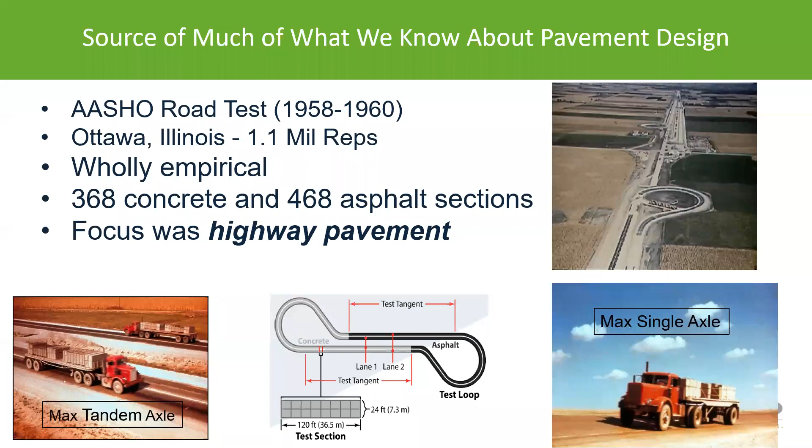And it says here that what they did there was look at what the pavement did based on the traffic that was driving on those 368 concrete pavement sections and 468 asphalt pavement sections. This was purely for highway pavement. Up with those test sections, well, they guessed asphalt and concrete.

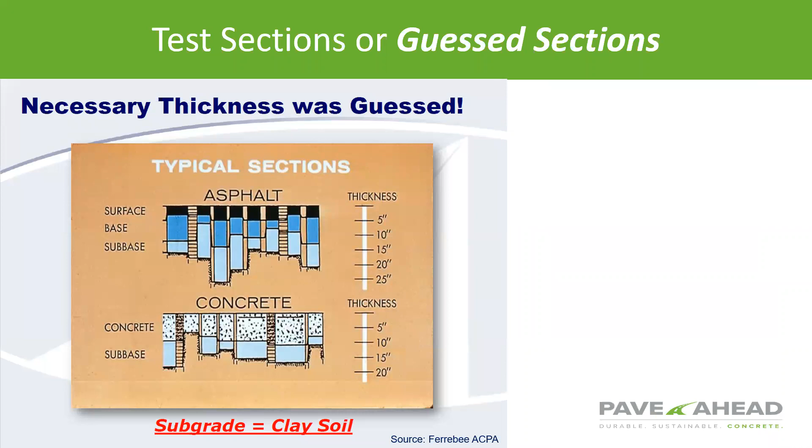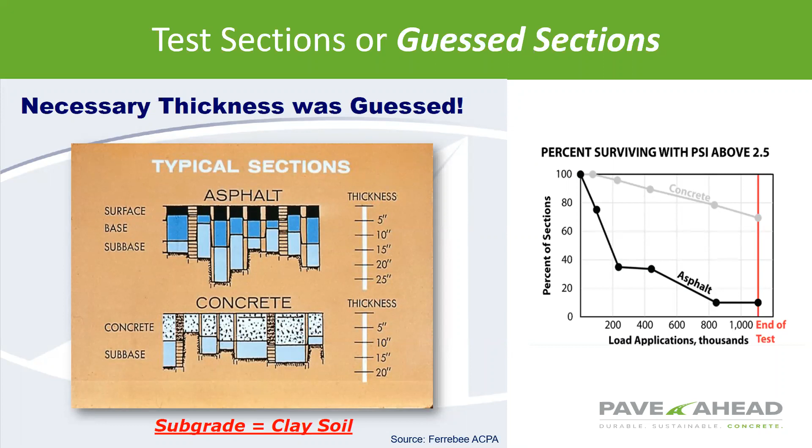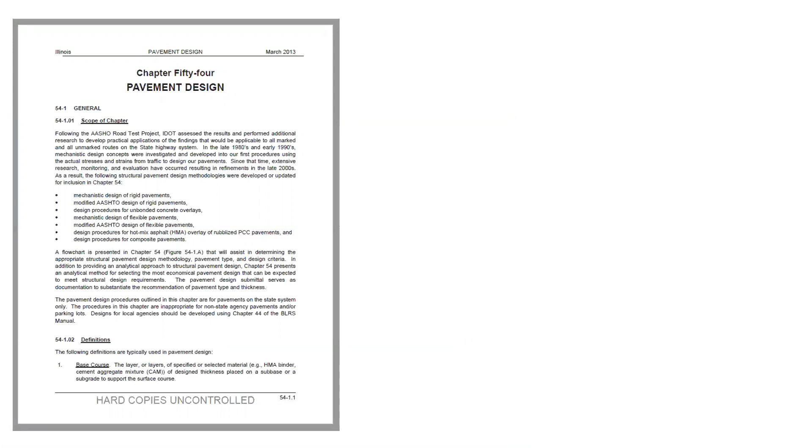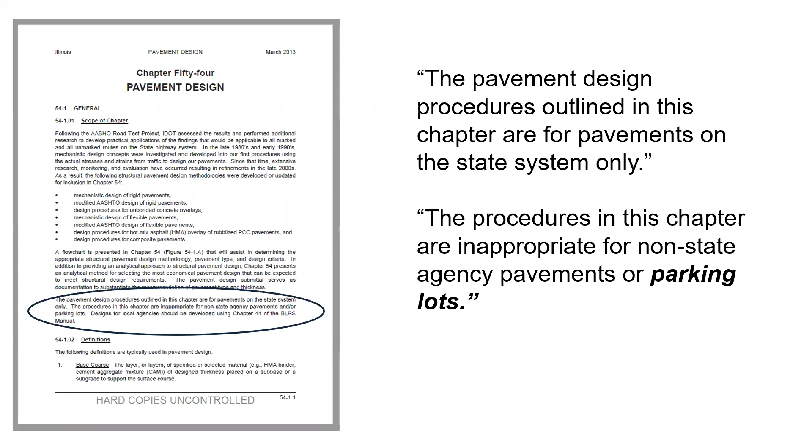The subgrade is clay soil. So really they're only based upon how this particular soil type performs, not around the country. This is the first pavement design manual that, about 2/3 of the way down the page, says the pavement design procedures are for pavements on the state system only and are inappropriate for non-state agency pavements or parking lots. So really what they're telling you is that applies to IDOT pavement design methodology and AASHTO methodologies as well.

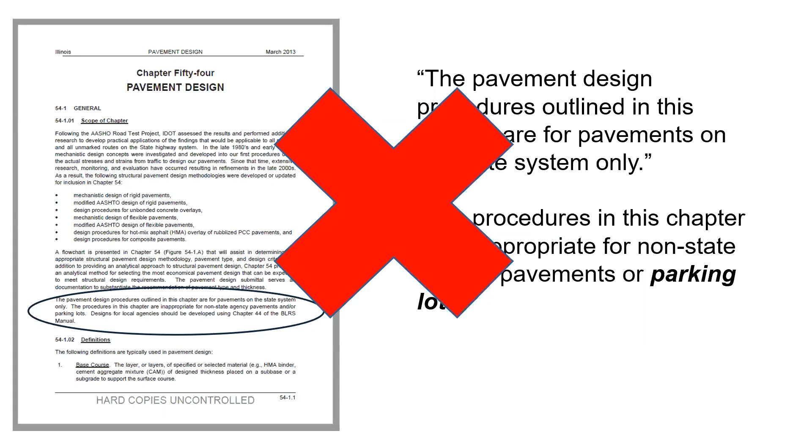So what can engineers use for local Portland cement concrete pavements? There's what we call the PCA design method by the American Concrete Institute. It designs concrete pavements based upon two failure modes. You have slab flexure, and then there's erosion failure, which would be that load transfer at the joint. Also, there's a free web-based program for this methodology. It's called pavementdesigner.org, a collaboration between the National Ready-Mix, the Portland Cement Association and the American Concrete Institute.

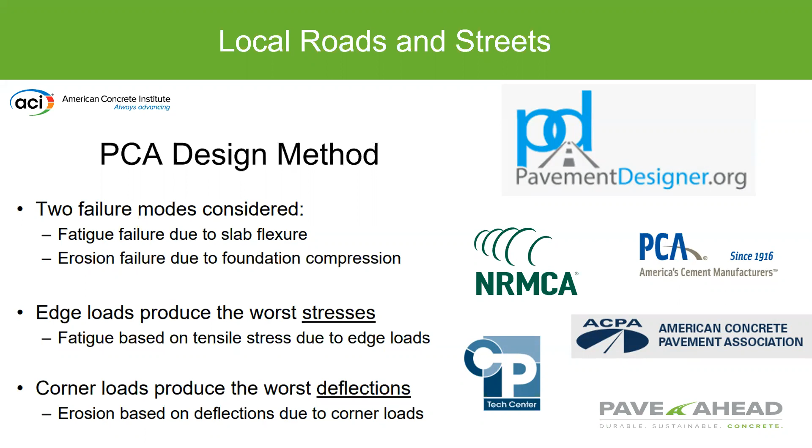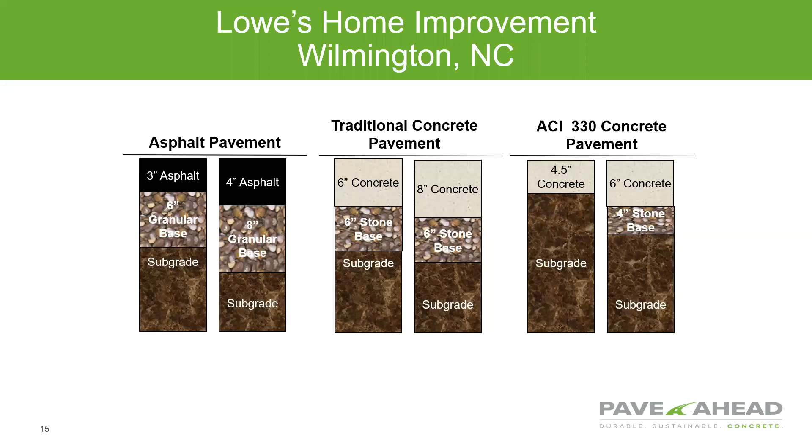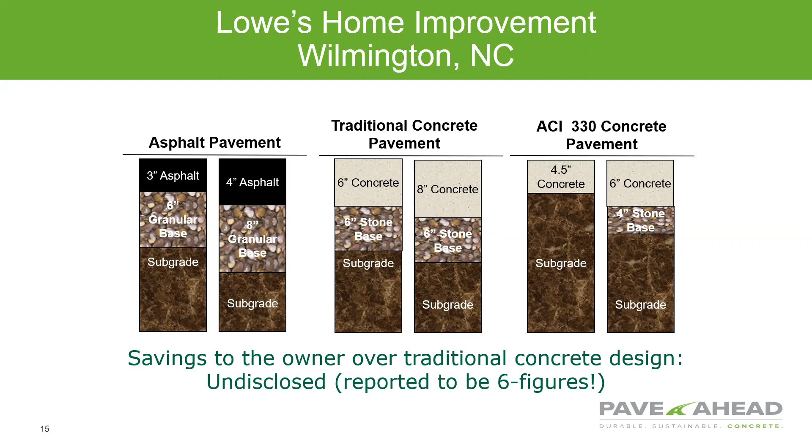So, briefly, I just want to get into using that method over AASHTO 93. These two showed up on a project for Lowe's Home Improvement in Wilmington, North Carolina. You had the asphalt and concrete pavement sections using AASHTO 93, ACI 330, and PCA, with the same traffic and the same type of subgrade. You can see that the concrete base was reduced from 6 inches to 0 stone subbase, and for the heavy-duty pavements, it was pavement on a 4-inch stone base. The savings were reported for just going with the design method using ACI 330.

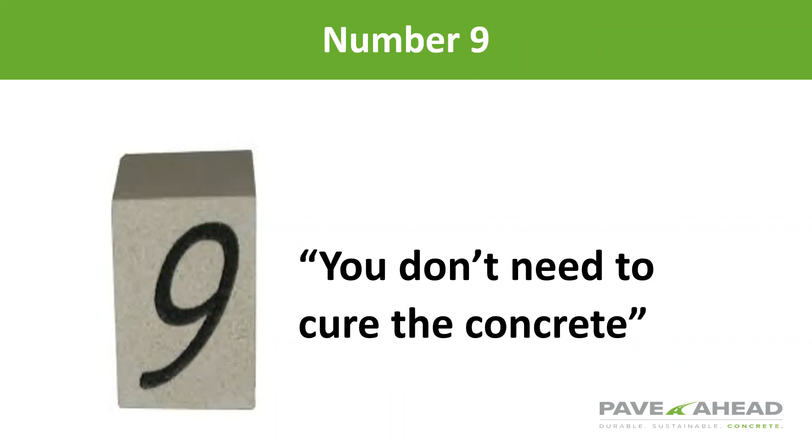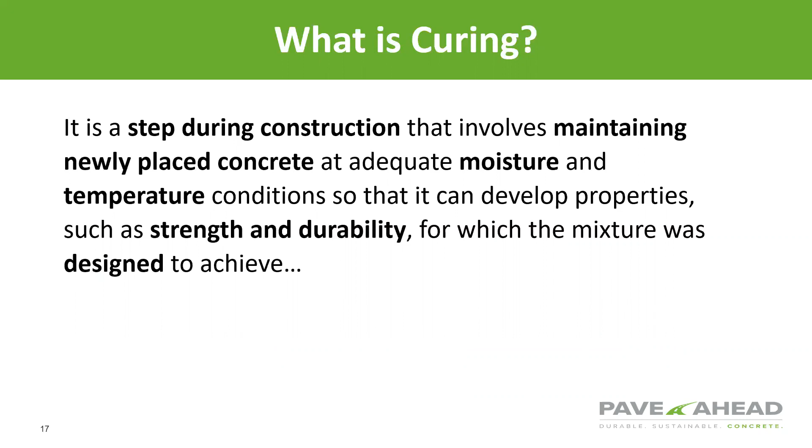Don't need to cure the concrete? Well, curing is a step during the construction process that involves maintaining adequate moisture and temperature so the concrete can develop properties such as strength that the mix was designed to achieve. So with proper curing, concrete gains strength, rapidly at earlier ages, but continues thereafter for an indefinite period. And it shows if you don't cure the concrete, the strength is much lower.

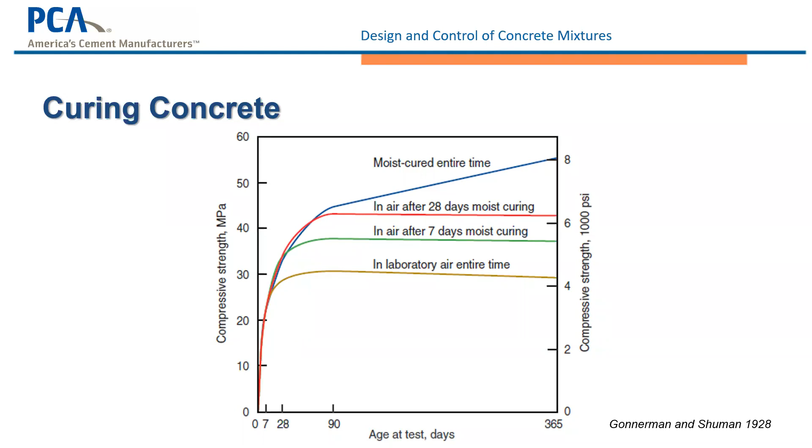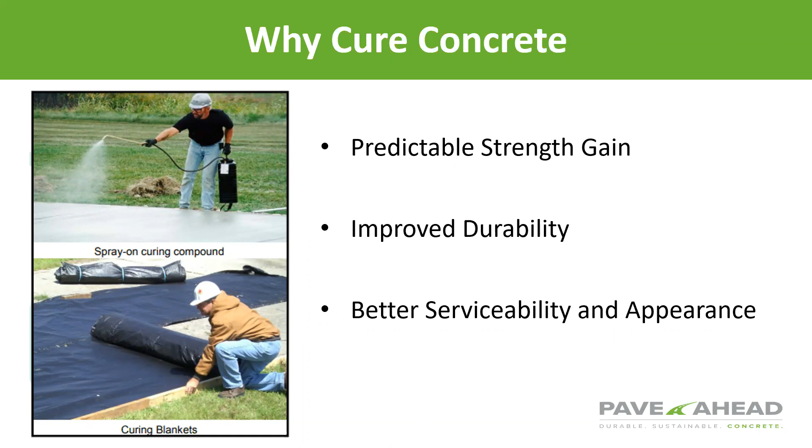That was 28-day strength. So you can see in this particular case, the concrete strength at 28 days was 6,000 psi compressive strength. If it wasn't cured or was cured improperly, it was much less than what that pavement was designed for in the first place. And it also shows that if you moist cure the concrete, you get higher strength than it was designed for at 28 days. Curing really gives you predictable strength, pavement durability, and overall appearance on your pavement surface.

So there are concrete curing materials that can be a film-forming compound, which is a waterborne film-forming material for application to fresh concrete. You can have an absorptive cover, or a moisture-retaining polyethylene film, or a white burlap, in the pictures there to the right.

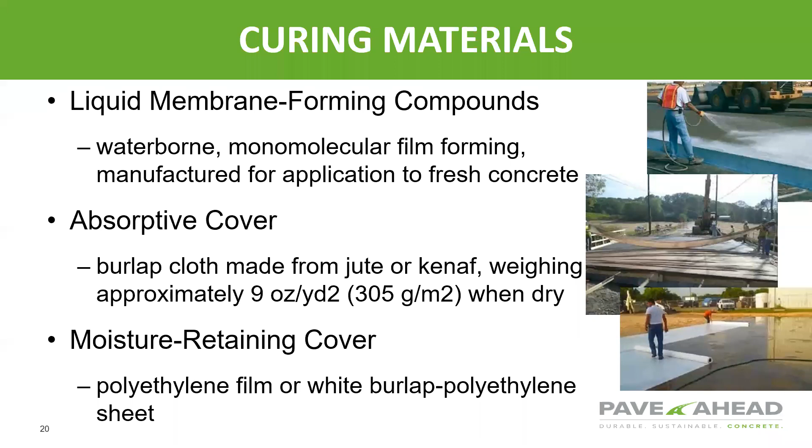Number 8: concrete pavement, so I need a thicker aggregate base course. If we look at how a flexible pavement works, it has asphalt typically, and then you've got various aggregate base courses, a sub-base course, and subgrade soils. The way a flexible pavement works, the pavement layers, both the asphalt and the aggregate, work together for that structural purpose in supporting the load.

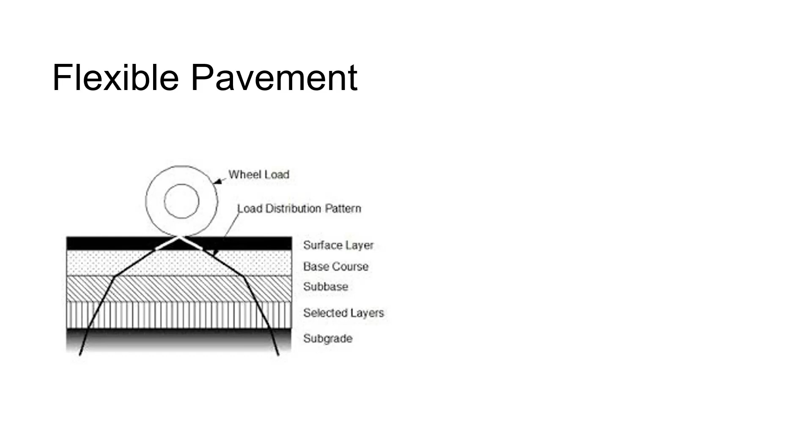When we look at a rigid pavement, the concrete layer really handles the load being applied to that pavement. So the flexural and tensile strength of that concrete pavement supports that wheel load. You'll notice that aggregate layer down below provides very, very little structural support. The thing is the load is spread out. We'll take a little bit of a look at that soil.

A couple things I'm going to talk about here: the modulus of subgrade reaction, or the California bearing ratio. These are two that describe your subgrade soil. K is the load per unit area of soil. The CBR, typically evaluated in place, is the load required to force a standard piston divided by the load required in graded crushed stone, in accordance with some ASTM standards.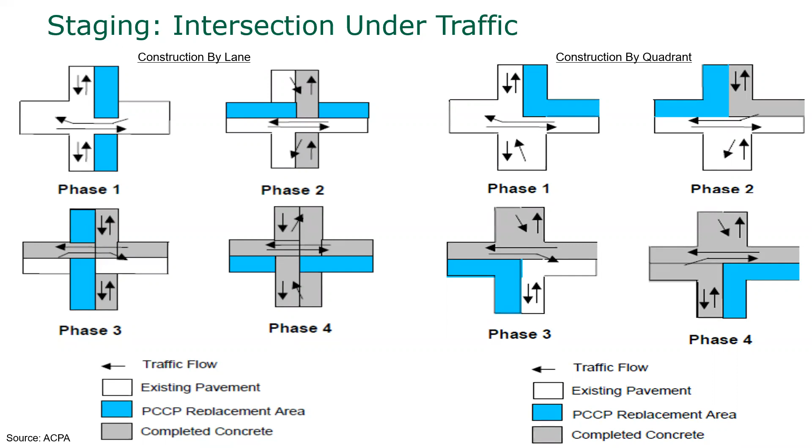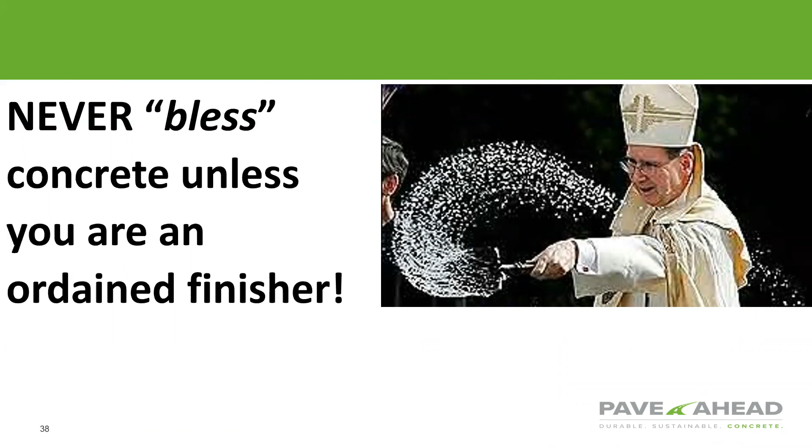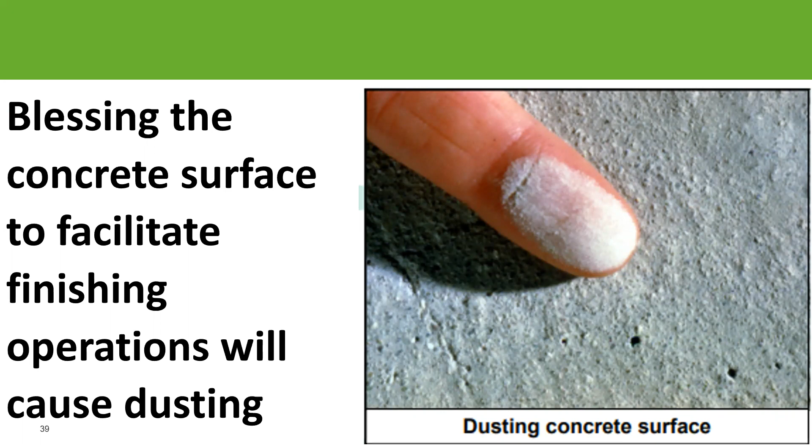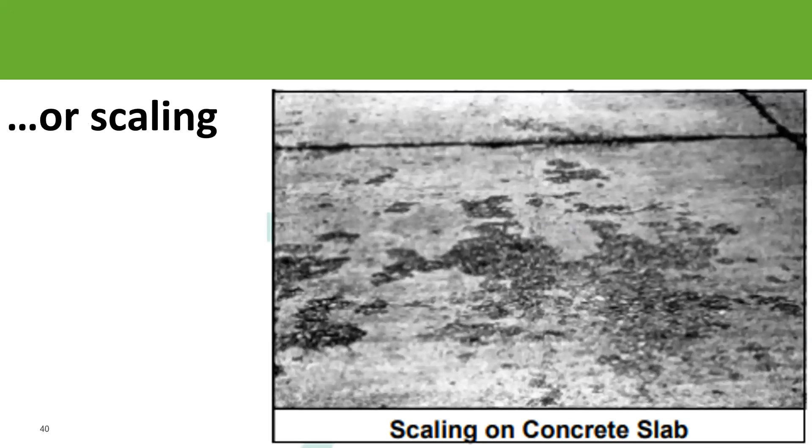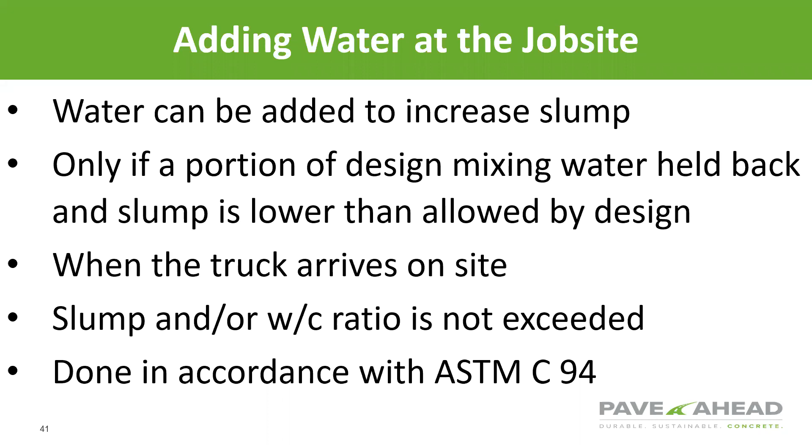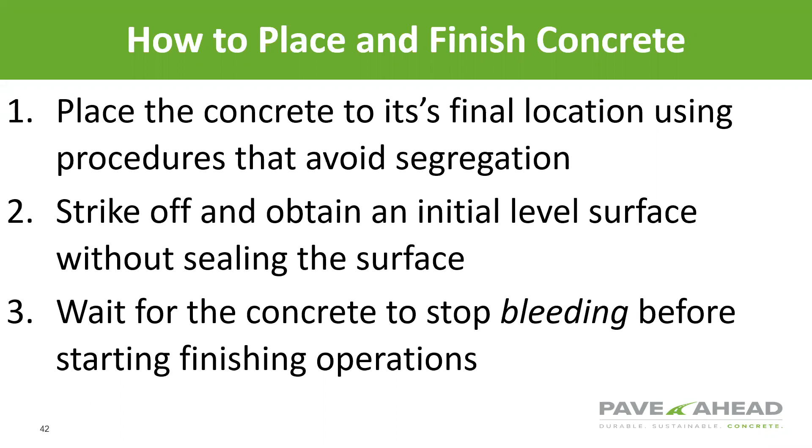So how do you want to place it? You want to place the concrete so that it's placed in its final procedures that avoid segregation. You want a level surface without sealing. Wait for the concrete to stop bleeding. You want to texture the surface as required. Just finish it so that you're able to get elevations that you want. You want to saw cut the joint. Try to do that as soon as possible.

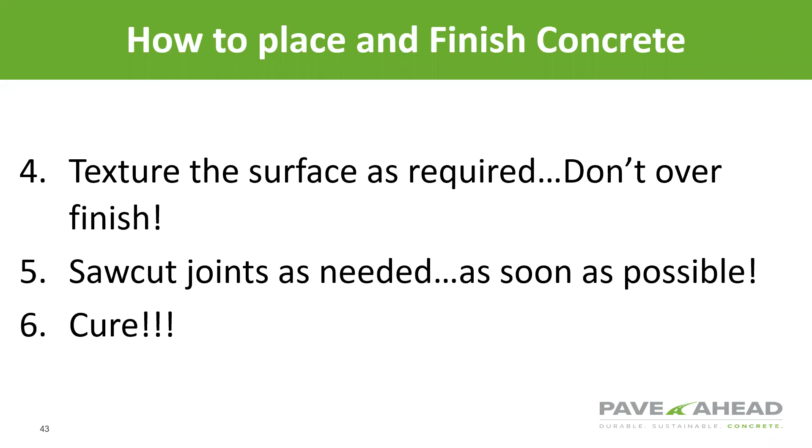How long should I wait to saw cut the joint? 24 hours. It really depends. Temperatures are. It depends what the humidity is. That you get a hot, windy day. Well, you want to saw cut those joints as soon as possible. Or most importantly, cure that pavement.

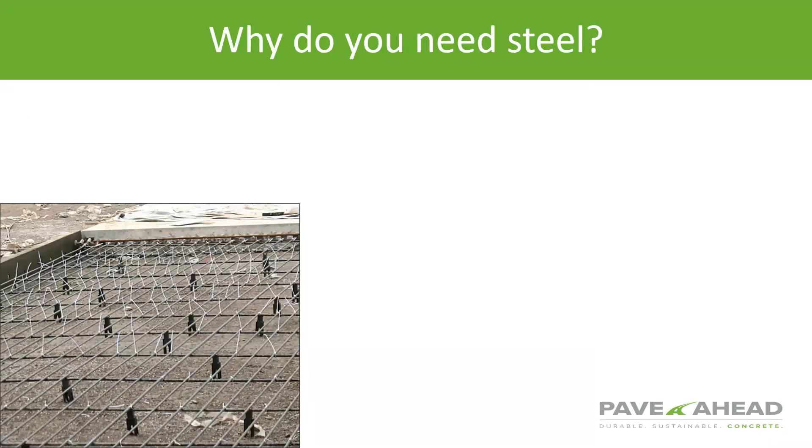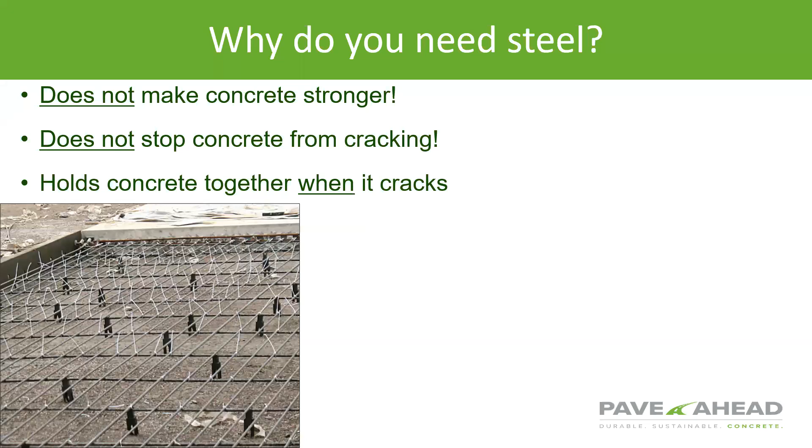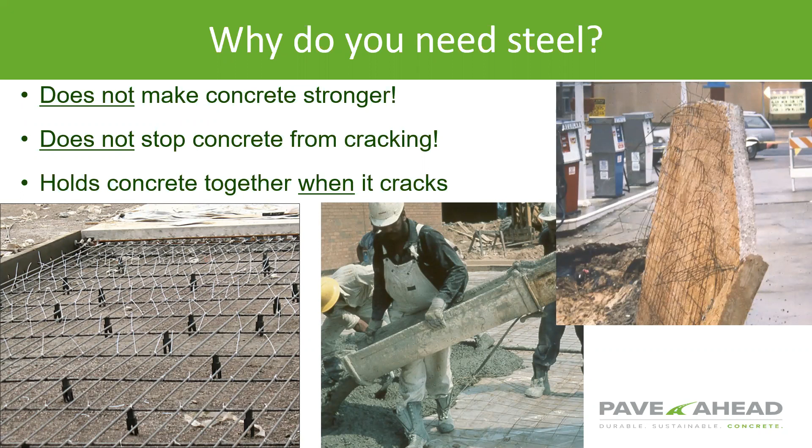If you want to add material, the better way to go would be to add fibers. You'd be looking at steel, exterior pavements. You're looking at the microfibers, which are the smaller, really just for plastic shrinkage crack control. The macro fibers are those, they're probably about 2 inches long. They look like very coarse hairs.

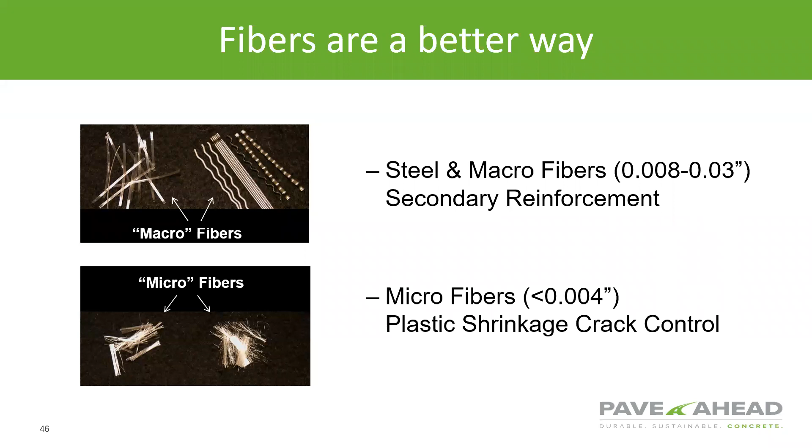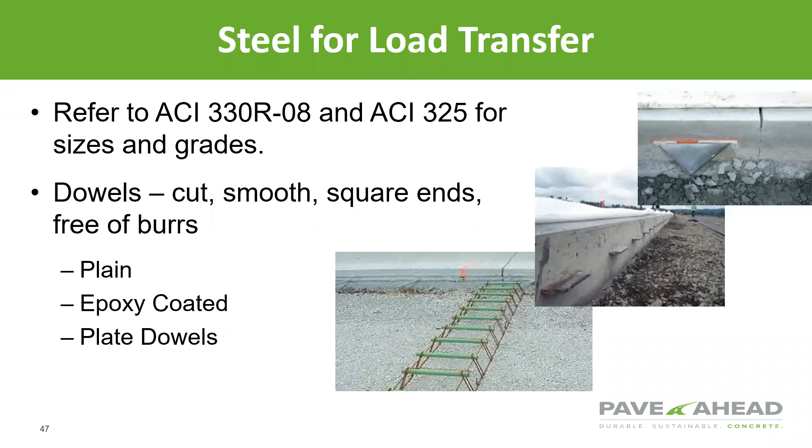Sometimes steel is necessary, so we have dowels for load transfer. They should be cut. They should be free of burrs. If required, we recommend smooth round steel. Epoxy coated bars are recommended with de-icing salts. There's also either rectangular, also not listed here, but would be hollow dowels, used successfully as well. And so it takes less to install those dowel baskets as well.

Tie bars that prevent slabs from moving. The table here shows the sizes typical for number 4 bar on chairs or other supporting, and are incidental. Those chairs also provide no structural value as well.

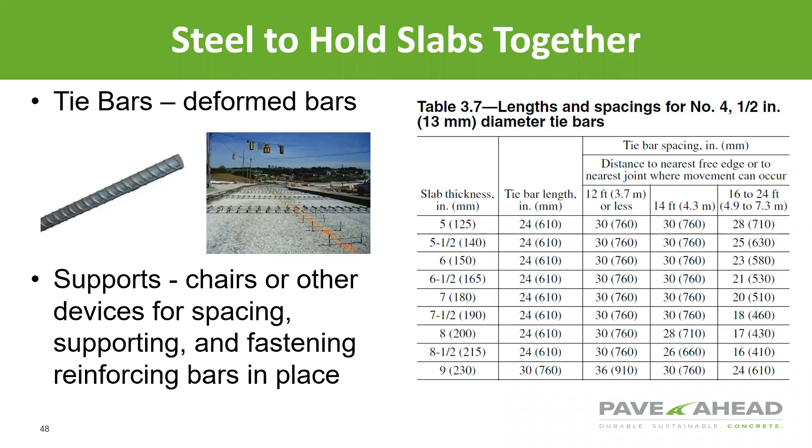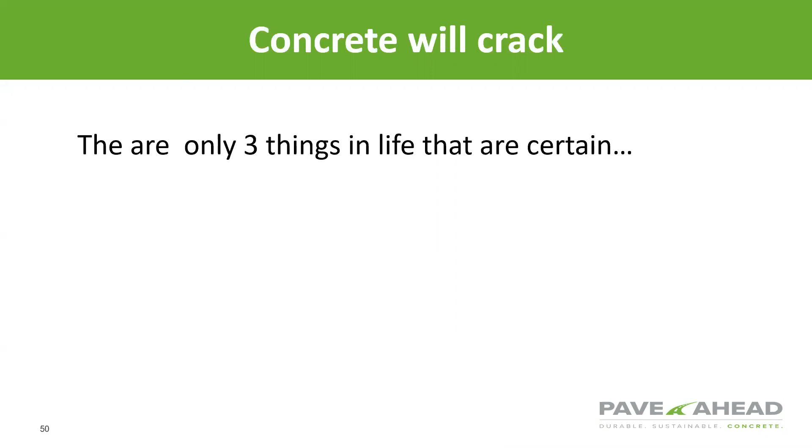Well, concrete will crack. There are things in life that are certain: death, taxes, and concrete will crack. Concrete cracks because it shrinks. If the concrete slab is not restrained at any point, there wouldn't be any cracks. But you've got an aggregate base, or even the soil, restraining it at that surface, so it cracks.

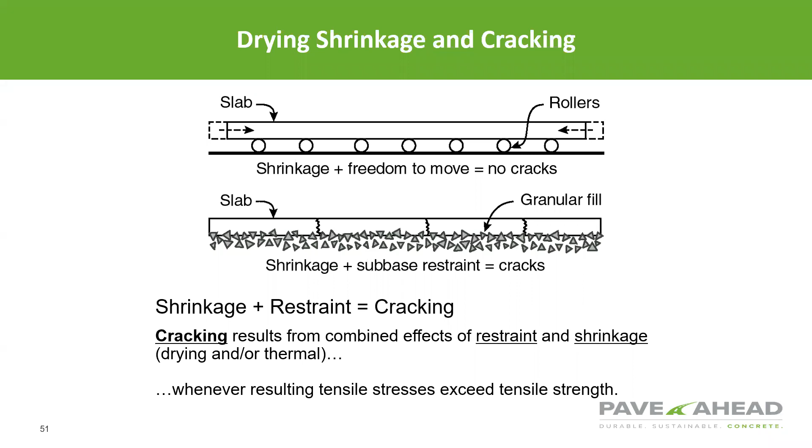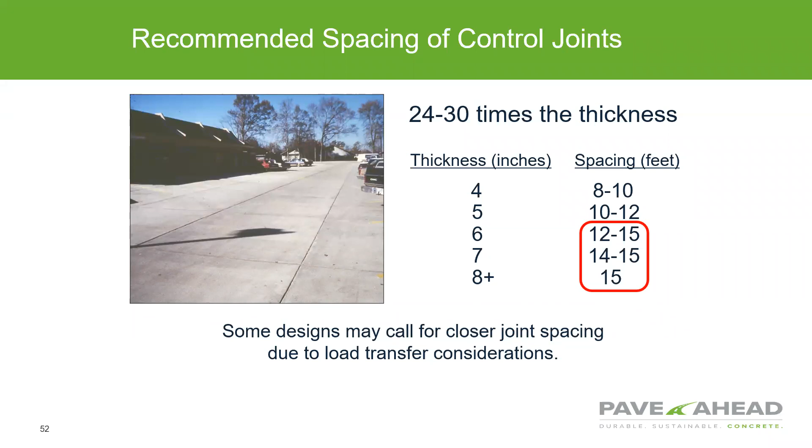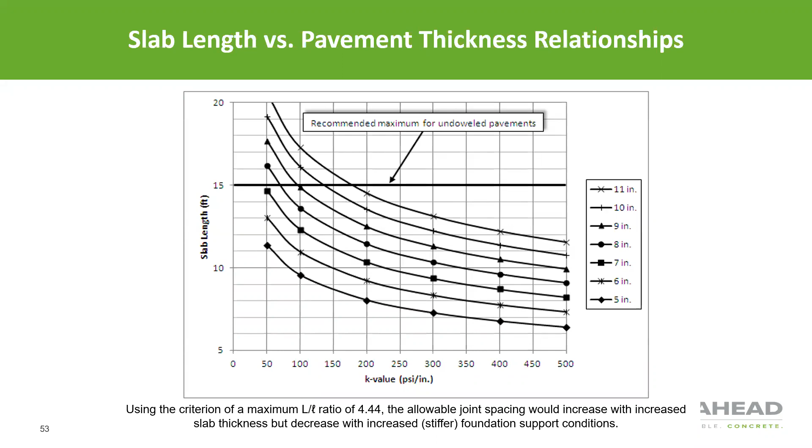The graph demonstrates the relationship between slab and support. You can see here that as the base becomes stiffer, the spacing decreases. So if you have cases where you have a stabilized base under concrete pavement, you really want to consider shorter joint spacing in that spectrum.

As I said, rules of joint spacing and slab dimensions: 2 to 2.5 times the depth, times the given thickness in inches. Avoid odd-shaped slabs where possible, and keep them as square as you can. Ratio 1.5 to 1, the length-width ratio, but I'd recommend no more than probably 1.25.

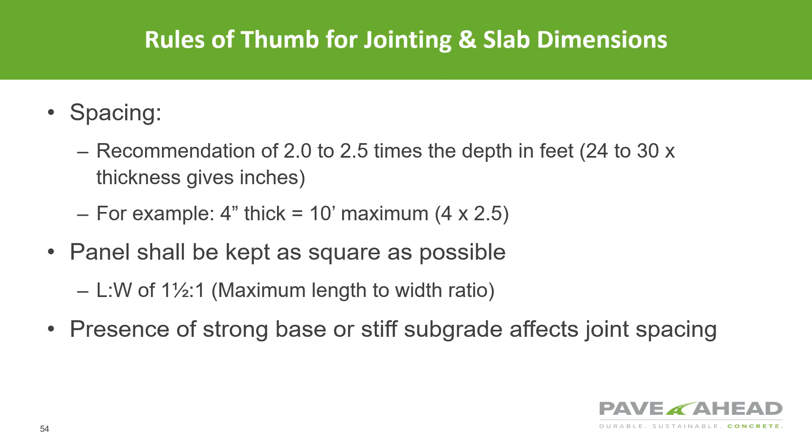When we look at our joints, take a look at corners and acute angles. You can see here what we want to consider, whether that curb is formed integral, or if you've got a curb and gutter type system, where the joint comes in. You want to make sure that it's perpendicular to the curb, somewhere 2 feet away from the curb face, for that joint to then propagate over to the curb.

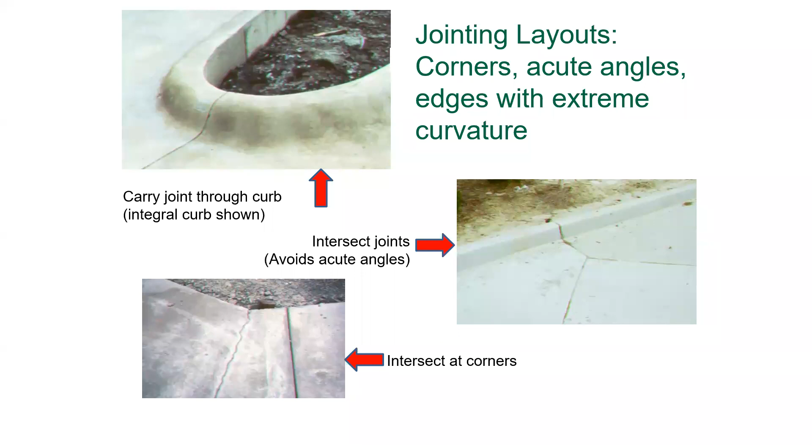Any type of intersecting joint, the picture down at the bottom, they really cut that joint so that it's perpendicular, at the edge of the slab, to try and get that joint over by that angle coming into the slab. Where you've got an inlet coming in, entrance corners coming off the inlet, that crack's going to want to form. So you have the saw cut joint before you get to the inlet; that's really what you want to consider. You'll see here the concrete cracked where it wanted to, instead of where it's placed, with that acute angle.

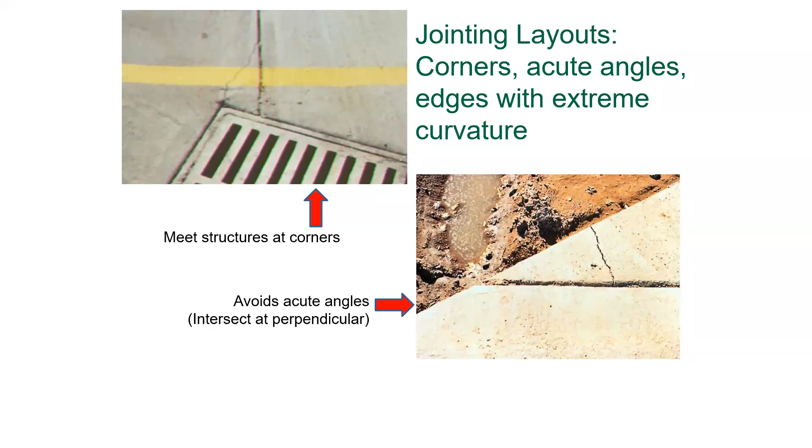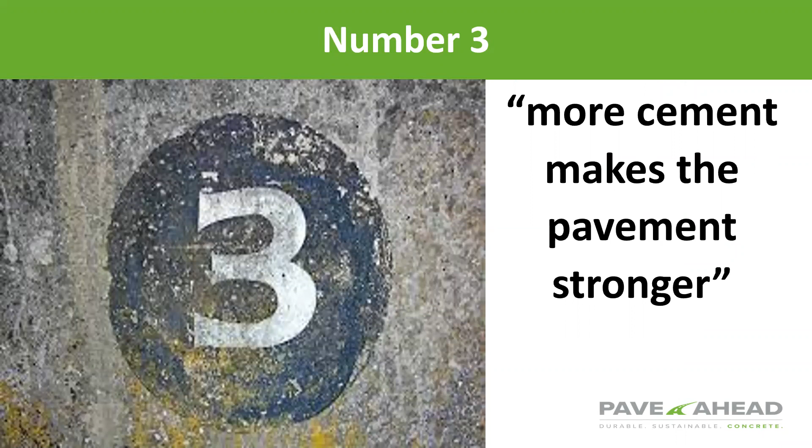So we're down to number 3, stronger. It does, but what shrinks is the paste, not the strength of the concrete. To do that, typically they add more cement, which means more water is required for hydration. This increases shrinkage and the potential to crack. The aggregates aren't going to shrink.

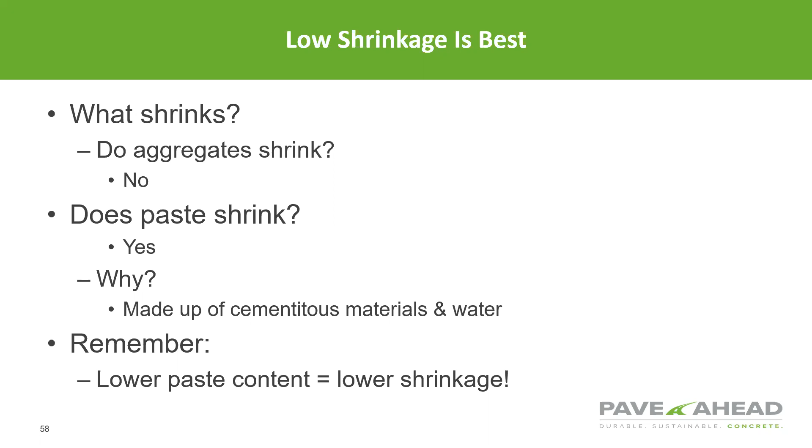We talked about strength. Strength is fine, but what we want is a durable pavement. And how do we make that durable? So we want the pavement to withstand de-icing salts and reactivity. So we want quality aggregate, adequate cement, and entrained air in our mix. We need our contractors who are committed to producing quality work.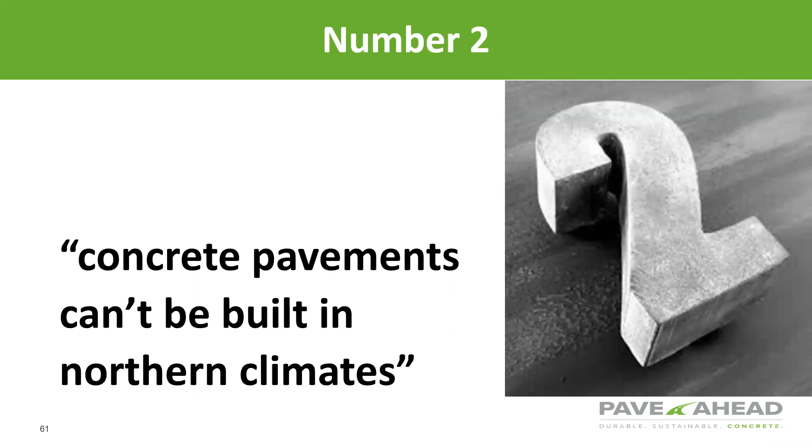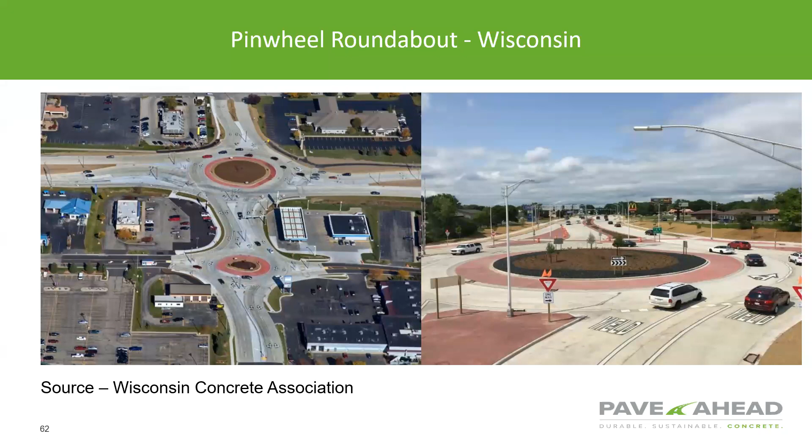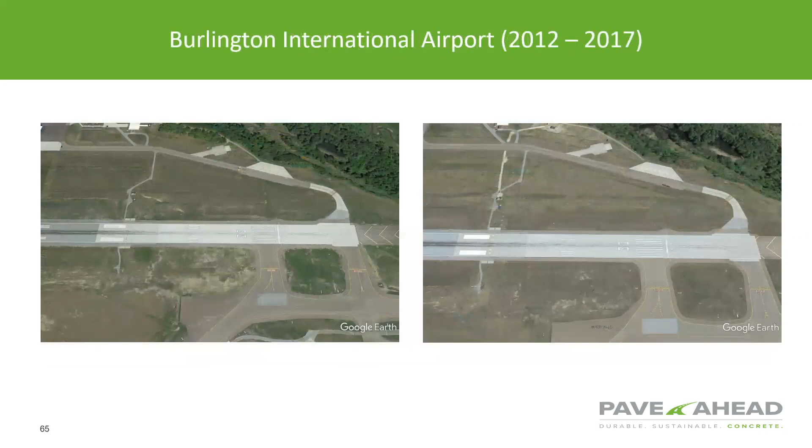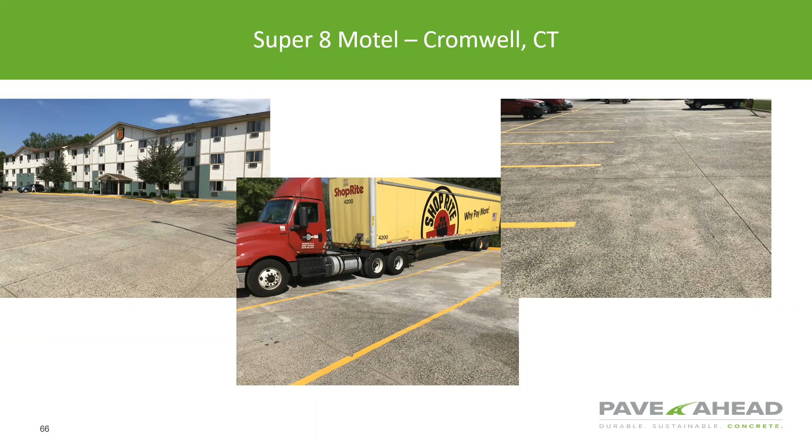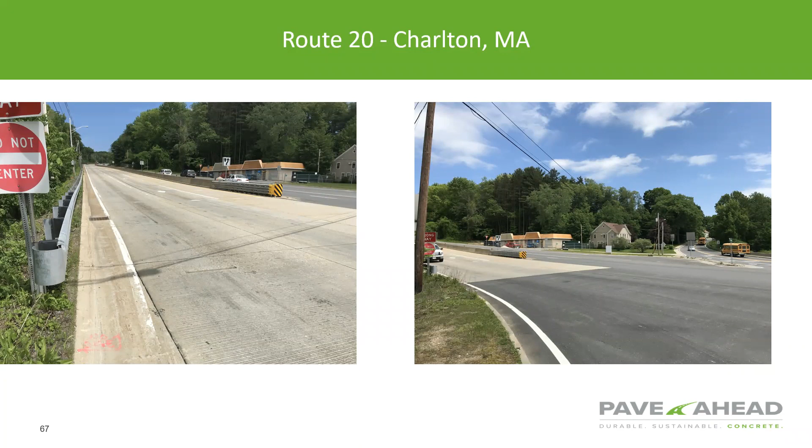Up in Charlton, Massachusetts, typical of New England pavements, this was a project coming down the hill, and the pavement used to be an asphalt intersection. That asphalt intersection has been milled twice since the original concrete. On the left is the original concrete construction.

So what are we going to do to reduce the risk of this in northern climates? We want to use a low water-cement ratio in that 0.4 to 0.42 range. Use the appropriate cementitious materials, whether it's slag.

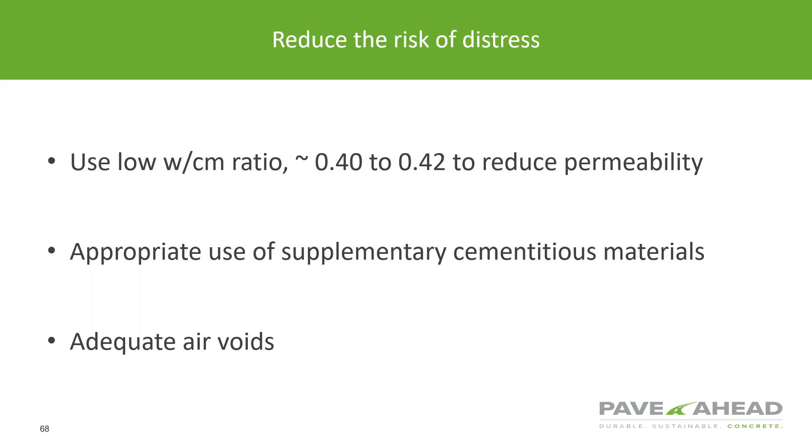We're applying a penetrating sealant to lower water infiltration and salt penetration to the microstructure of the concrete. So limit the use of aggressive salts after the pavements are constructed. They will eat your pavement. You should always limit that the first winter. That can be soft, even though it's hardened.

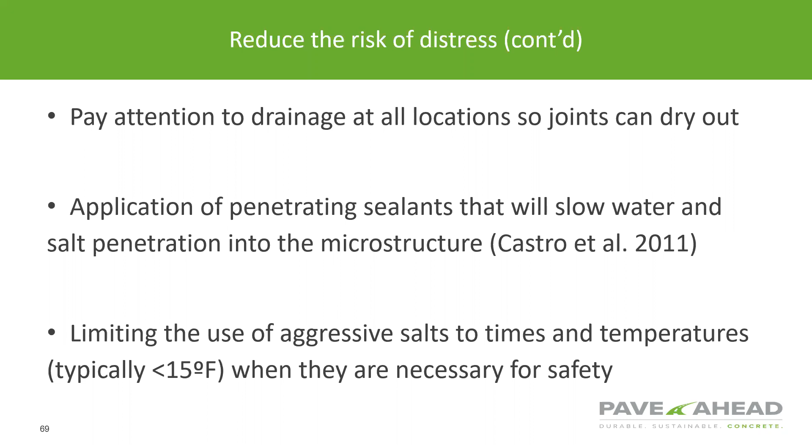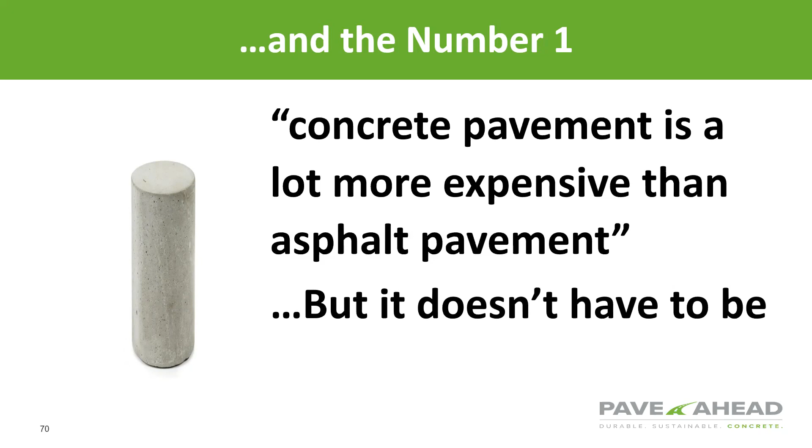So we've come to the number one myth, and that is that concrete is a costly pavement. But it doesn't have to be. Well, and here's how. Okay, I already talked about today. We don't need to have steel. You may need it at the joint or to tie those slabs, but the steel in the mat itself is really unnecessary. Eliminate that steel, the steel at the joints. That's correct. Where the load is not the controlling design factor, aggregate interlock can safely and effectively transfer load across the joint.

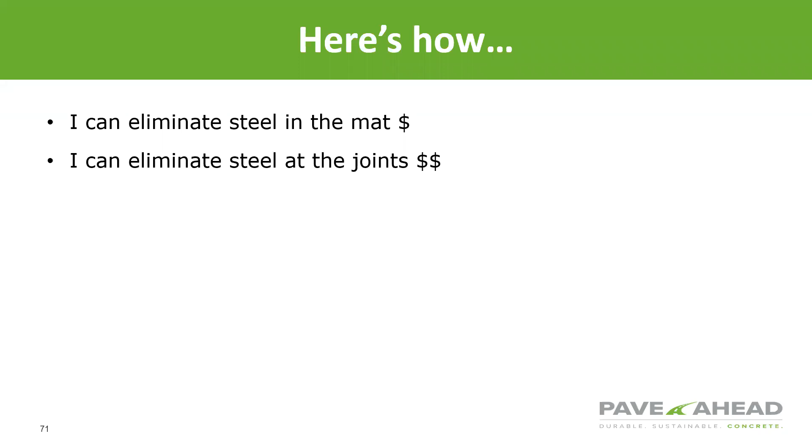So in thinner pavements, let's say a parking lot for a retail center or McDonald's, you really don't need them. Consider eliminating those. You can decrease in some areas. If adequate, you can eliminate the need for a base. I will say that aggregates will help provide a platform for constructing that concrete pavement, and that seems to be, say, the rule of thumb, especially in that area. I don't have to improve this. Look at how the subgrade really can affect the overall support provided by a poor subgrade, and that's going to affect your overall concrete thickness.

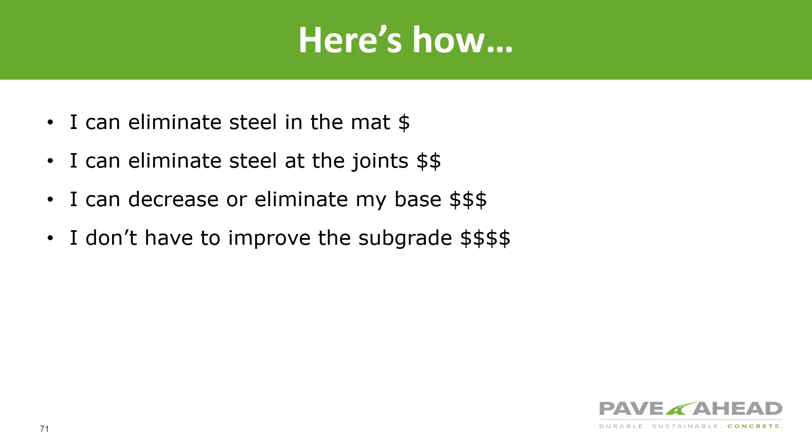You should use ACI 330 for concrete parking lot pavements. For local roads and streets, ACI 325. Those are the two you can use to design those concrete pavements. You can use materials to reduce cement. That's true. And silica fume to help reduce the overall cost so that it is more competitive to an asphalt pavement, and it also improves durability at the same time.

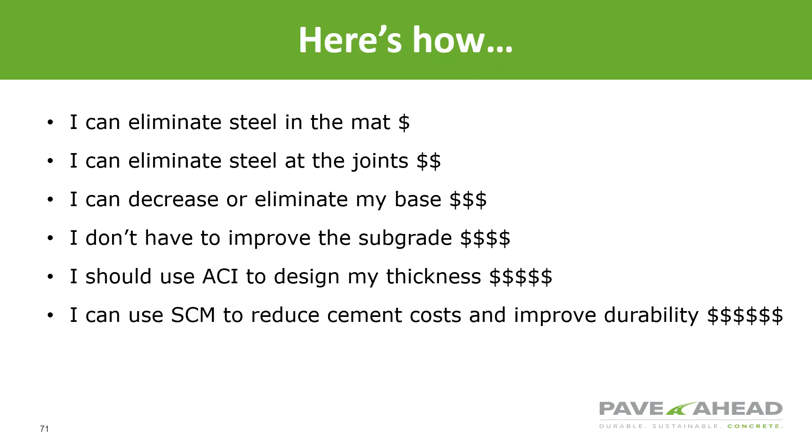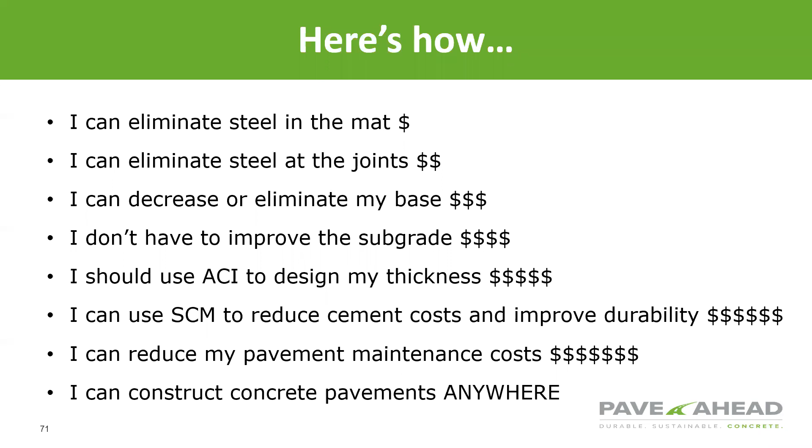Your pavement maintenance costs. So when you compare concrete pavement to an asphalt pavement when it comes to life cycle costs, I won't say that concrete pavements are maintenance free, but they require much less than asphalt pavements. So no having to seal coat the pavement, and if it is maintained properly, it should serve for years to come. And lastly, you can construct no matter what the climate. Whether north or south, with concrete paved properly, they can function just about anywhere.